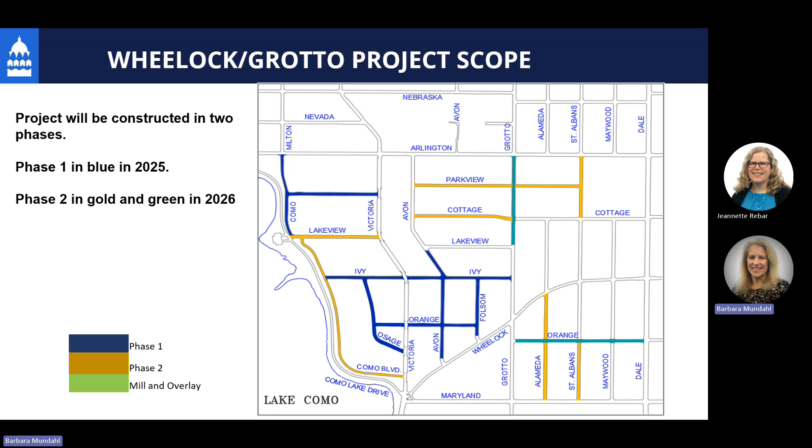So today we're focusing on phase 1, which you can see here, the streets that will be reconstructing in 2025. We plan to start construction in the early summer of 2025 and be completed by mid-November, also 2025.

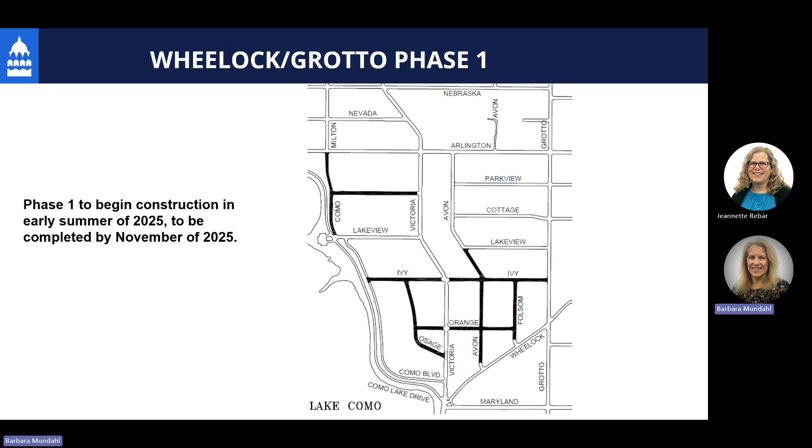The average street widths in the area range from 28 feet wide to 32 feet wide in a 60-foot right-of-way.

Some streets already have sidewalks. Folsom and Avon have sidewalks on both sides of the street. Ivy has sidewalks on the north side only. Orange and Parkview have no sidewalks at all. Most of the streets allow parking on both sides, and sometimes the boulevards have eroded so much from parking that the streets appear a lot wider than they actually are.

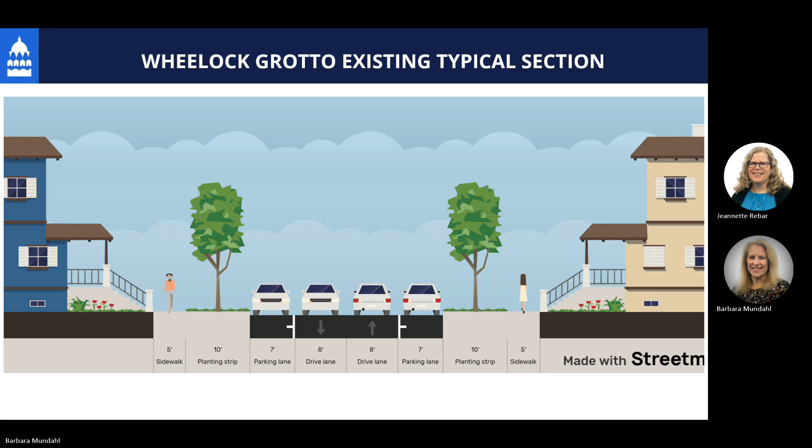East Como Boulevard from Ivy to Parkview ranges from 24 feet wide to 28 feet wide, with parking squeezed in on the east side.

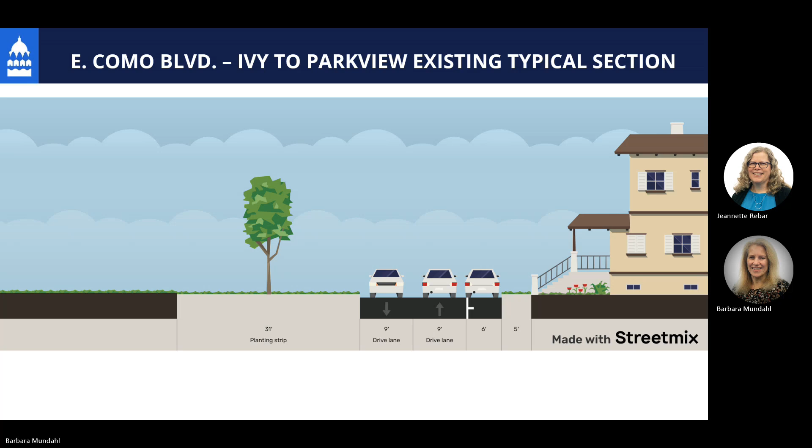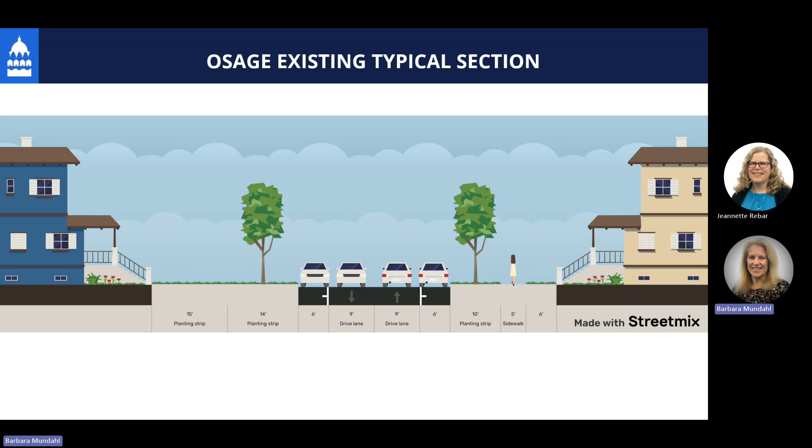Osage has a wider right-of-way at 80 feet, and the street width ranges from 28 to 34 feet. There is sidewalk on the east side, and that sidewalk is about 5 to 7 feet away from the property line. The wider right-of-way allows for plenty of room to install a sidewalk that can meander around trees to minimize tree impacts.

The existing conditions, as you can see, include eroded boulevards and poor pavement quality. Our surveyors have been out there, and I'm sure a lot of you have seen them. What they're doing is recording existing conditions, and they're also verifying property lines.

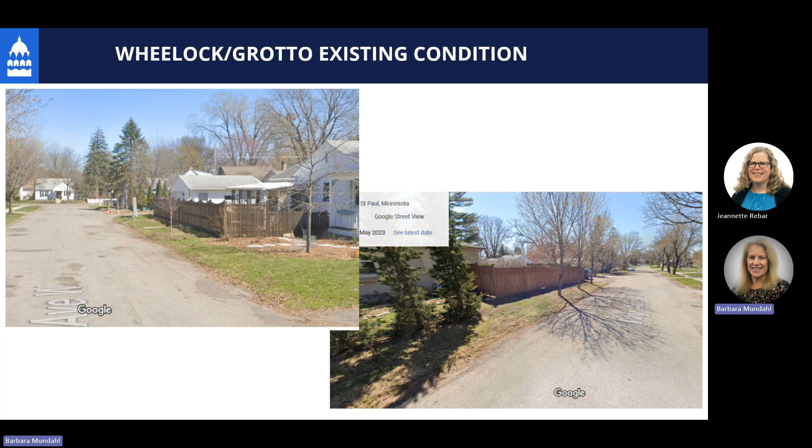It appears that many fences and retaining walls might actually be within the city right-of-way, so our surveyors are verifying those property lines.

There are many carriage walks. Those are the walks that go parallel to the curb, and they kind of act like a curb now. Those carriage walks will be removed as part of the project and not replaced.

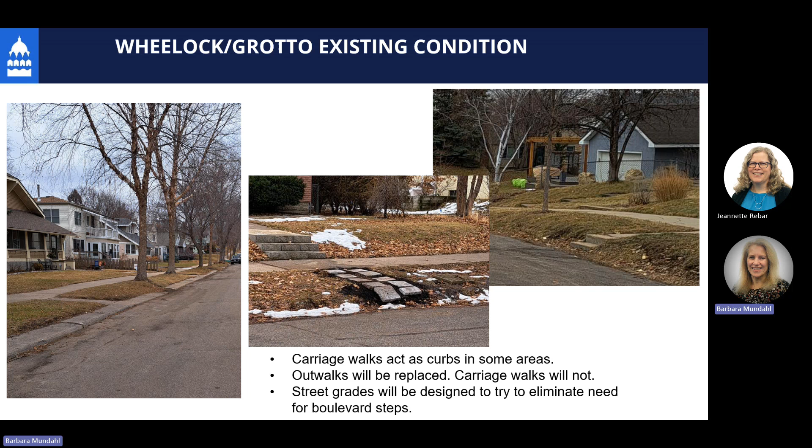However, the outwalks, which are the sidewalks that go from your front door out to the curb, will be replaced. We are trying to grade the streets such that we'll no longer need outwalk steps, and that'll be more of a flat surface or slope down to the curb.

There are many sidewalk gaps in the project area, and we will have some limited space in some areas to create an ADA compliant sidewalk.

There are many retaining walls in various conditions within the project area, and where there are new sidewalks, we will try to stay away from those retaining walls to minimize impact.

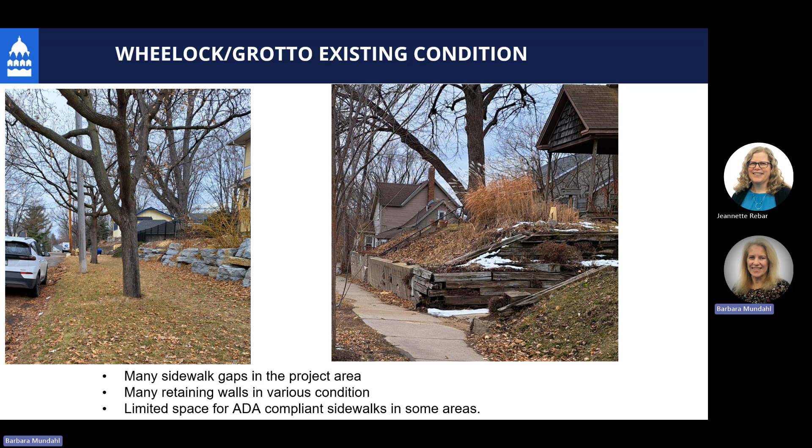So some design topics for the project. I've heard from a lot of people concerns about sidewalks. Paving projects strive to implement council-approved policies, and the sidewalk policy was passed in 2017, recommending sidewalks on both sides of an improved street.

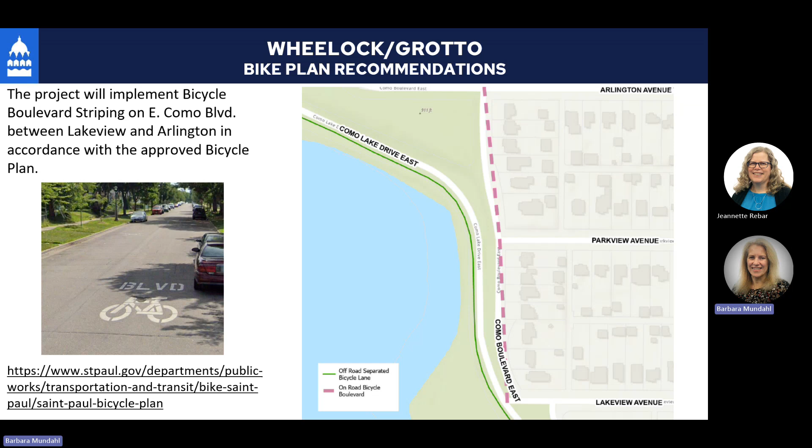We'll also be implementing a bicycle boulevard striping on East Como Boulevard between Lakeview and Arlington in accordance with the approved bicycle plan. This is not a bike trail, simply pavement markings indicating share the road. For more on the bicycle plan, another link is provided.

So what are the proposed improvements for this reconstruction project? It includes new concrete curb and gutter, new roadway pavement, lots of utility upgrades including new sewers and new water main, sidewalk replacement, new sidewalks where none exist, ADA compliant ped ramps, lantern style street lighting, and tree planting.

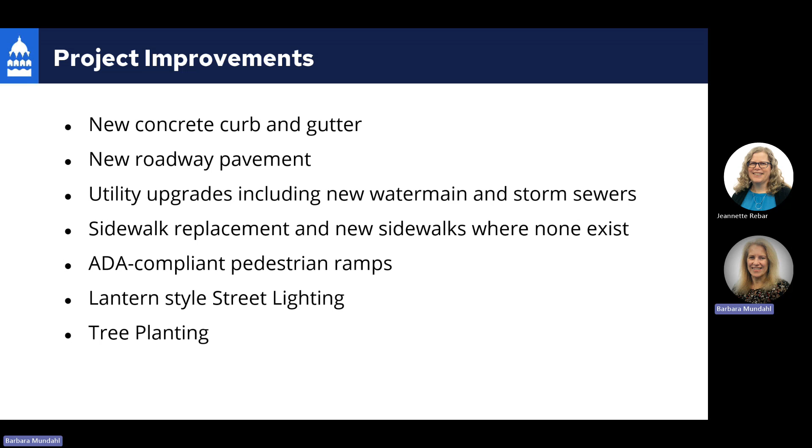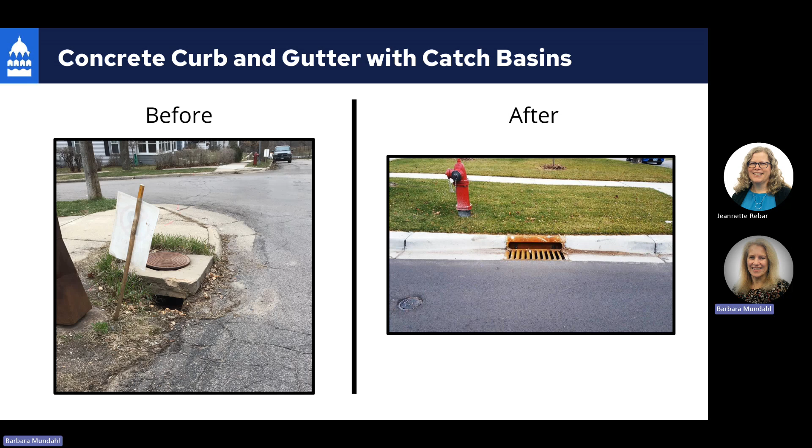So we will be putting in concrete curb and gutter as shown in the after picture with new storm catch basins. The curb and gutter helps manage stormwater and directs the runoff into catch basins. In some areas of the project, we will be installing infiltration trenches under the street to filter some of that stormwater.

As mentioned, bituminous pavement will be a lot nicer, smoother surface for drivability.

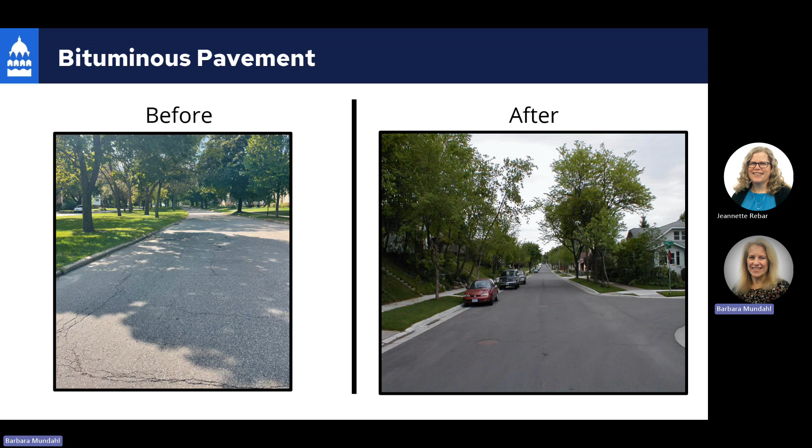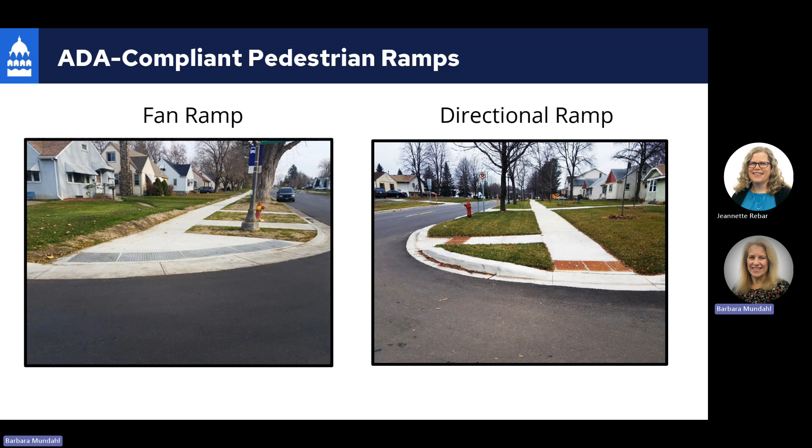With the sidewalks, we will also be including ADA compliant pedestrian ramps. There are two shown here. One is directional, and if this little area becomes too small, we will install a fan ramp instead.

Driveways, all the driveway aprons will be replaced as part of the project. They will be concrete regardless of what they are now. If they're asphalt aprons, they will be concrete. If they're brick or any other special surfacing, it will also be replaced with concrete. The maximum driveway width that we will replace is 12 feet wide.

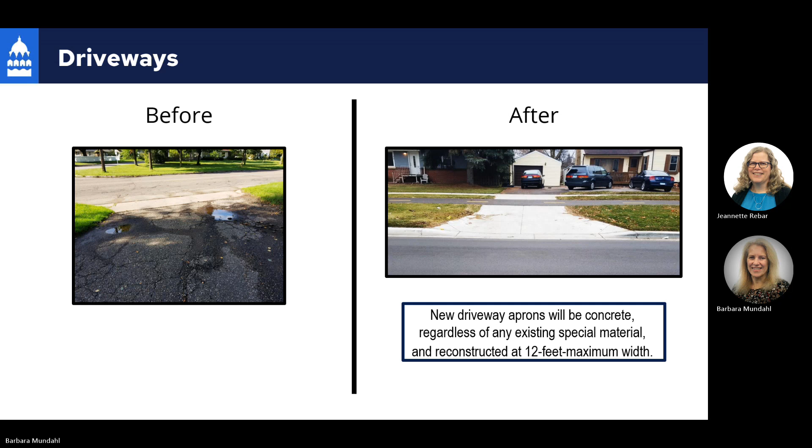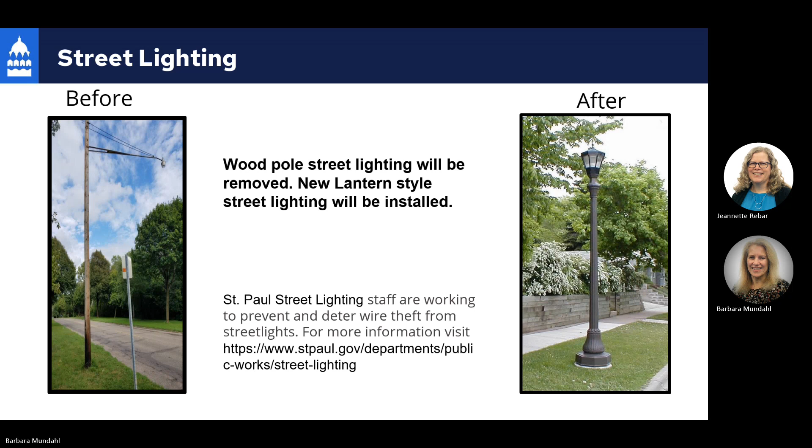There's a lot of very mature trees in the area. Some are very close to the curb and may be impacted by construction. St. Paul Forestry will be out to assess tree health and help us determine which trees will survive construction and which are better to remove. I understand there's been a lot of tree loss in the area from the recent storms.

In those areas, at the end of the project, we will plant new trees. Other potential impacts to existing trees may be lead water service replacement or sewer service replacements.

Trees will be marked prior to removal, usually with a red ring around them. So more to come on that.

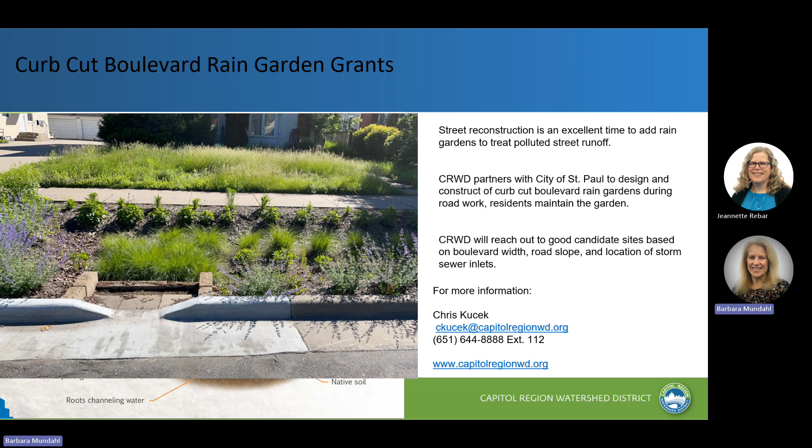If you are interested, you can reach out to me or to Chris Kucek from Cap Regions. Cap Regions will also reach out to property owners in areas that they think are good candidates for rain gardens.

So now we're going to talk a little bit about utility improvements. There'll be a lot of them in the neighborhood. To start out with, early next spring, private utilities such as Xcel Gas and communication companies will be upgrading their facilities. They'll probably start way before our paving contractor does.

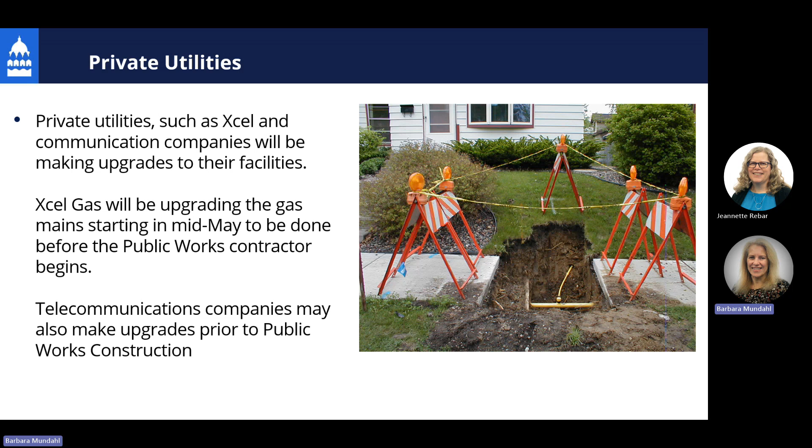They will replace gas services and communication lines, and they'll do a temporary patch, knowing that we're coming in to replace sidewalks and pavement later.

St. Paul Regional Water Service will also be upgrading their water mains. Many of the existing water mains are 6 inches in diameter, and the standard replacement size is 8 inches in diameter, so more water capacity.

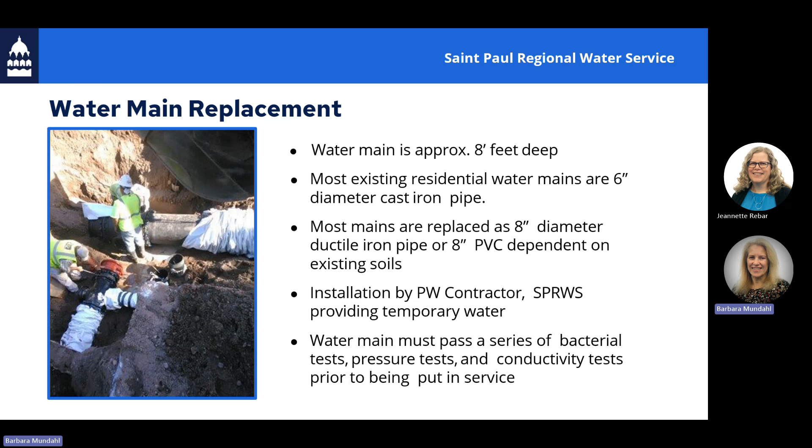The water mains are installed by our public works contractor, but they're inspected by St. Paul Regional Water, and water mains must pass a whole series of bacterial tests, pressure tests, and conductivity tests. So sometimes this process can take a while after the main is actually installed. Just know that they are testing those pipes for your safety before they put them into service.

In the meantime, St. Paul Regional Water will provide temporary water mains, which will be yellow pipes on the surface. The water can get warm in the summertime, but if you run your water, it'll cool down quickly.

These temporary water mains are fully bacterial tested prior to being hooked up to your home. And as an aside, water is provided at no cost when you're connected to a temporary main. So they like to tell people, fill up your pools or your fish tanks or whatever you need, because there will be no water bill during construction.

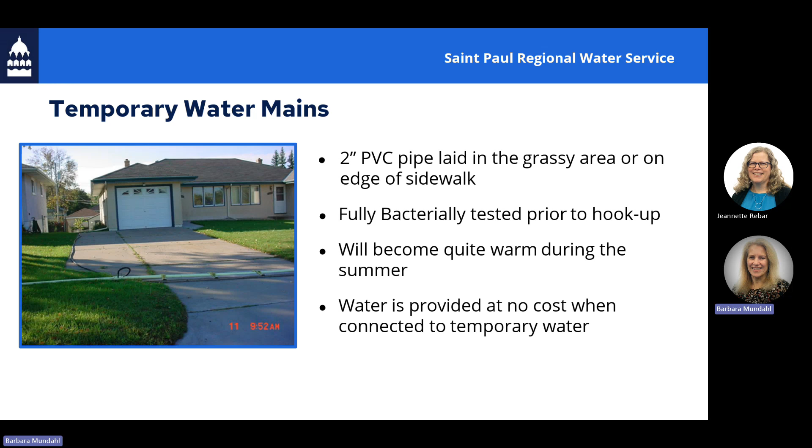When they hook up the temporary water main to your home, they will need access to your home to hook them up. Then when they take the temporary water mains down, they will need access again to disconnect them and then to connect you to the new main.

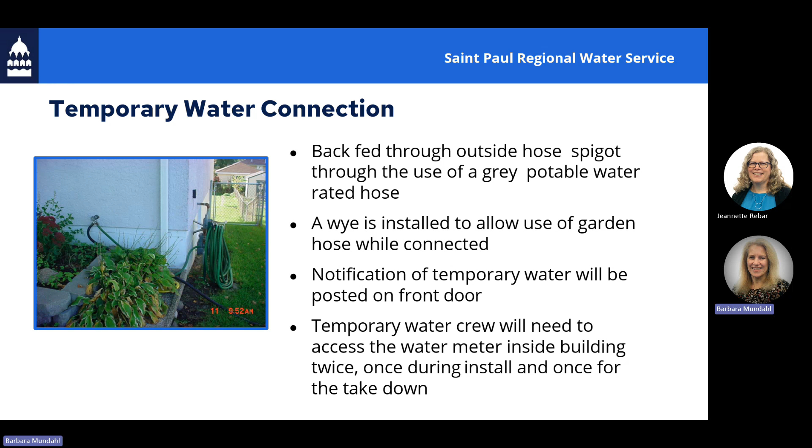St. Paul Regional Water will replace any lead services from the property line to the main at no cost. That's an automatic thing. There is an option to replace the service from the house to the property line, and that is funded by a special federal fund to get the lead out.

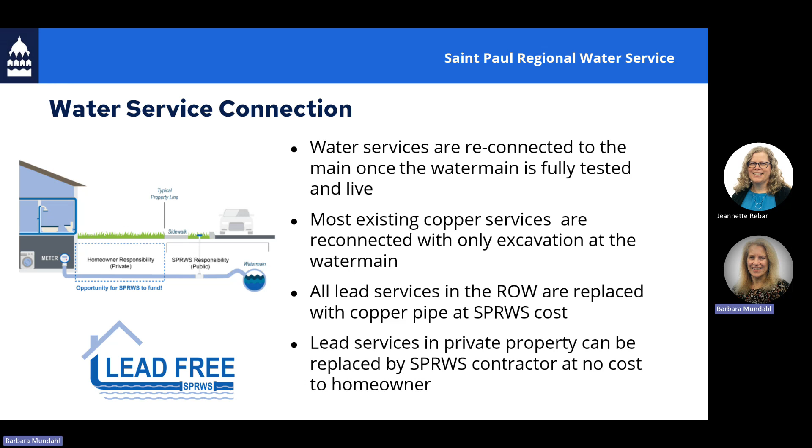For more information on that program, you can contact Luke Sandstrom from St. Paul Regional Water.

So again, St. Paul Sewers will be replacing sewer mains and offering, similar to St. Paul Regional Water, sewer service replacement.

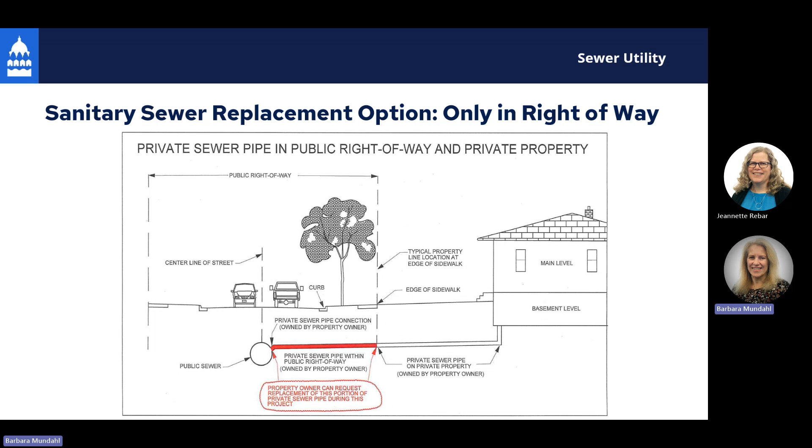As part of the project, we can replace your sewer service from the main to the property line. That is an additional fee that can be added to your assessment, and it's completely optional. You can opt to have the project replace it, and then if you want to replace the portion from the property line to the home, that would be done by a private contractor and organized by the property owner.

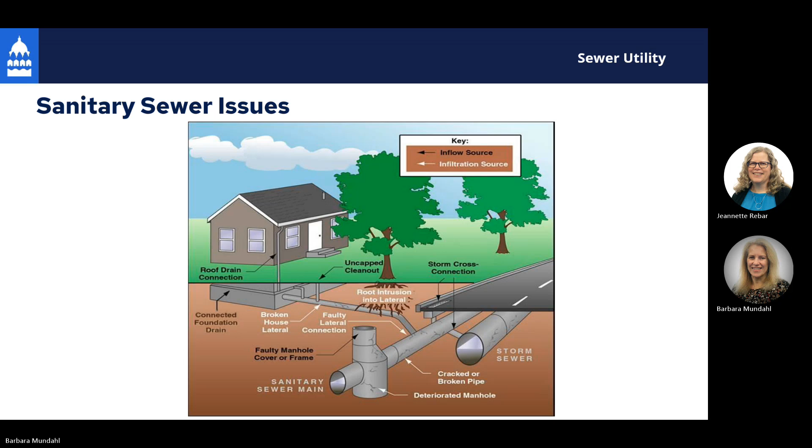Some common sewer issues we see are either a dropped connection to the main or groundwater intrusions into the sewer service. Some indications of a defective service include backups, or if things drain really slowly, if you know that there are trees or bushes planted over the sewer line, or if you have a sinkhole or depression where your sewer service is.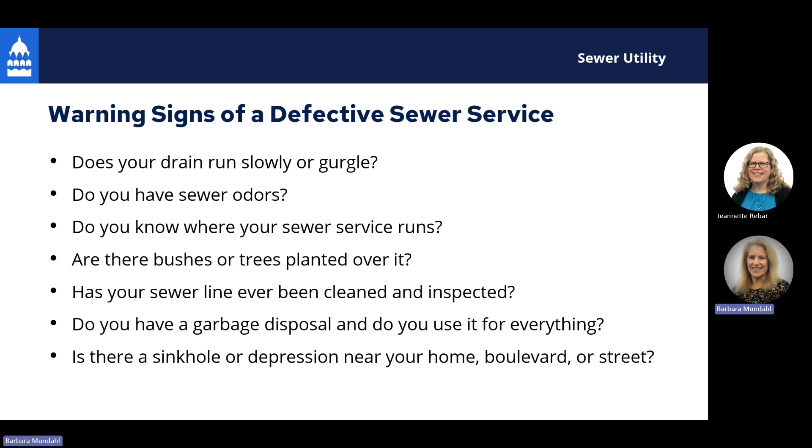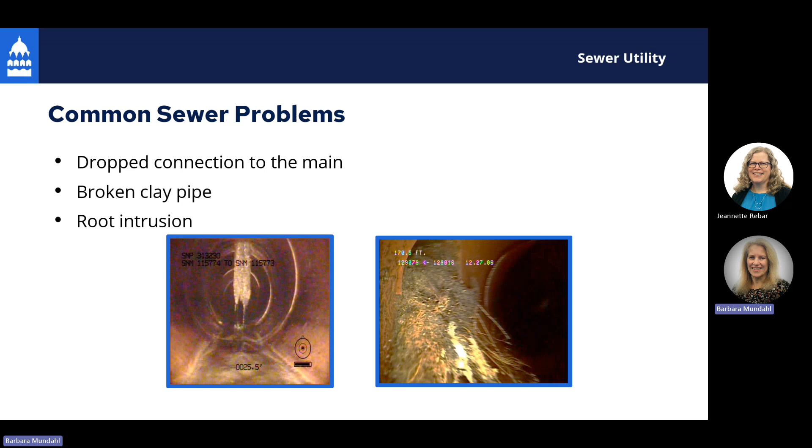Again, some common sewer problems is tree root intrusion, and then a dropped connection to the main.

Some benefits of repairing your sewer service during construction is that it's a lot cheaper with the main, and also you're not paying for street restoration. So again, it is a lot cheaper. You can put it on your assessment and pay it over 20 years.

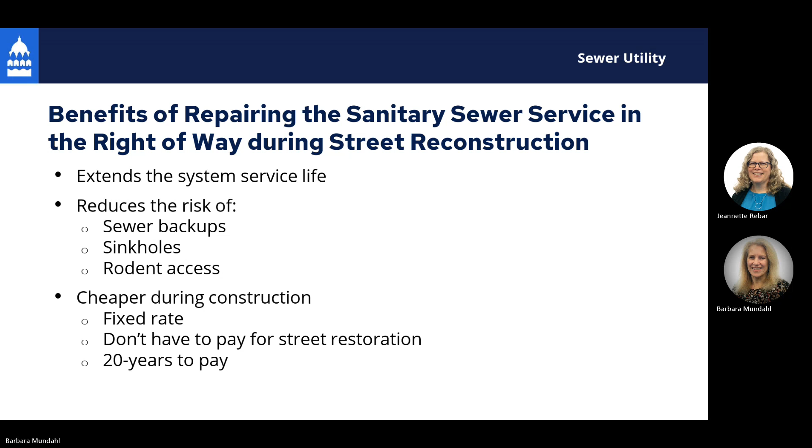Here's just an example of cost comparison with the construction project versus separately.

Property owners will receive a waiver form from St. Paul Sewers, giving the public works contractor permission to replace your sewer service. When you receive that waiver, if you want to take advantage of this offer, please fill out and return it to me or to the sewer department.

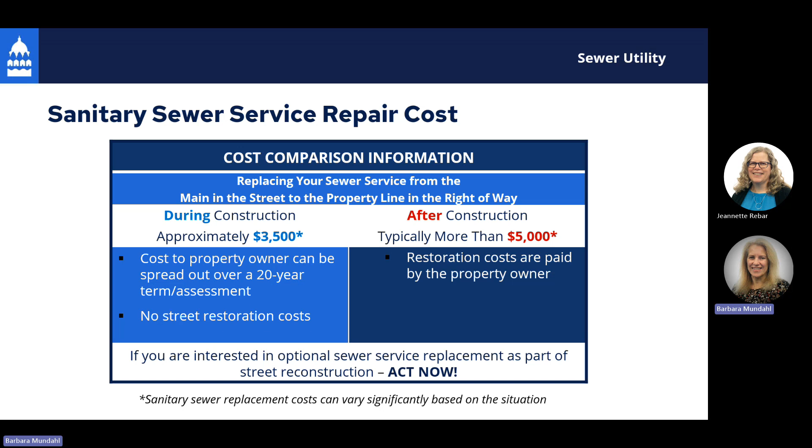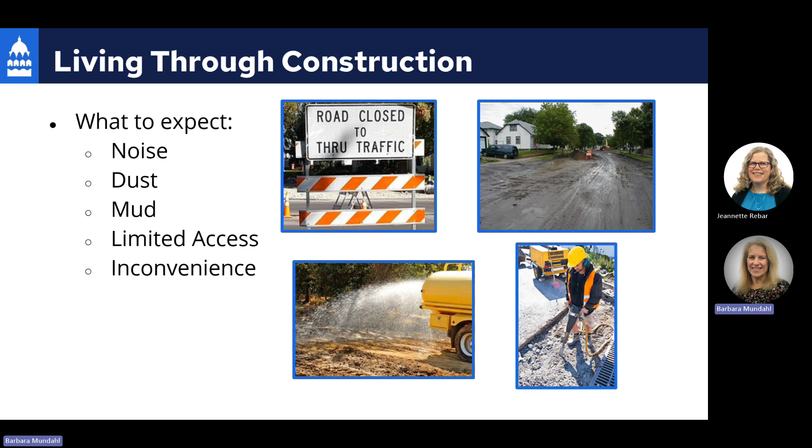So what's it like living through a construction project? It is inconvenient, and you will have some limited access. There will be noise and dust, and if it rains, there'll be mud. We will try to make it as easy as possible, but this is the nature of construction.

Your street will be dug up numerous times by different crews. I know it seems inefficient, but each of these crews specialize in a different aspect of the construction project. Work is done in layers, by different crews. Plan on about 4 to 5 months of disruption.

And when I say that, that's not 4 to 5 months in front of your house. That's for the entire project. Business, resident, and emergency vehicle access will be maintained at all times.

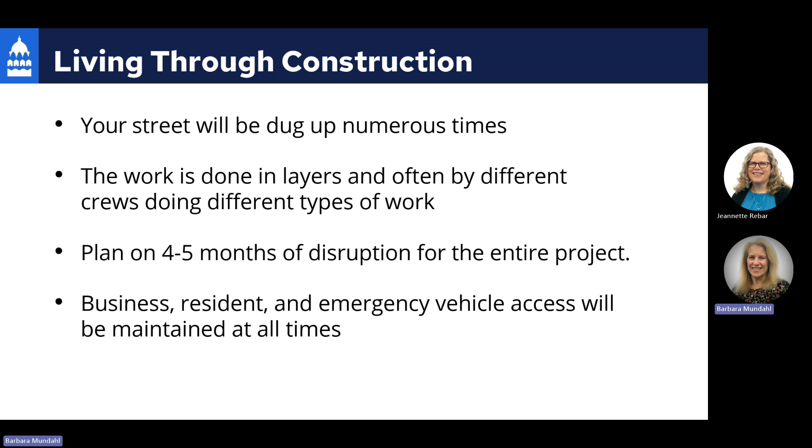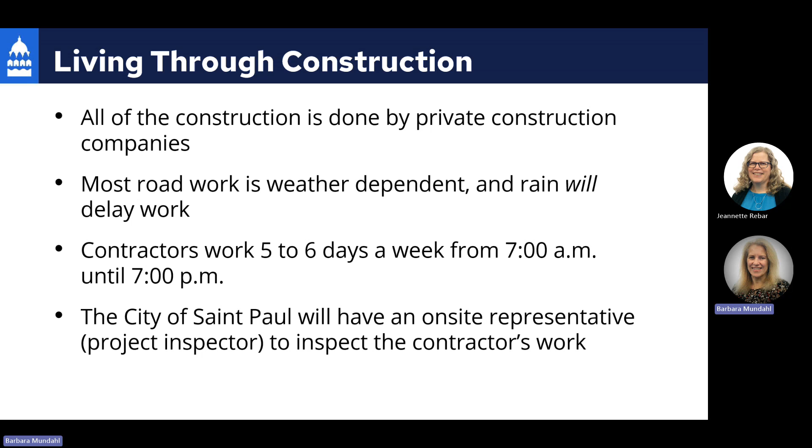All of the construction is done by private construction companies. They work typically 5 to 6 days a week from 7 a.m. until about 7 p.m. The City of St. Paul will have an on-site representative, like a project inspector, to inspect the contractor's work. And of course, road work is weather dependent, and rain will delay the work.

An important distinction between road closed signs: road closed to through traffic means that you can go around these signs to get to your destination, your driveway, but you won't be able to get all the way through.

If road closed signs mean do not enter, it's dangerous - there's probably a gaping hole on the other side of it. And if there's any question at all, do not - road closed means road closed.

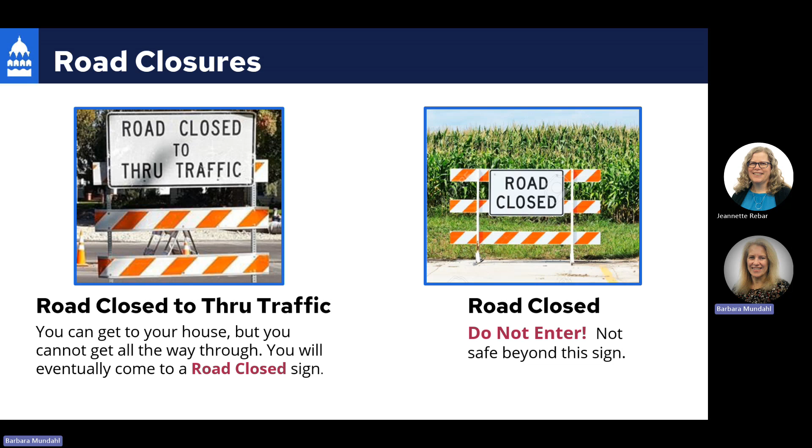You will receive a letter prior to the start of construction. I'd recommend keeping that for contact numbers and names. A flyer will be handed out before construction starts on your block. They usually put these on your front door, so please check your front door for flyers.

Again, we will have an on-site public works inspector, and that is the person that will be there on site and know what's going on. So they should be your first call, and we will provide that person's name and phone number with this letter. And then we will provide weekly updates, posted on our website, stpaul.gov.

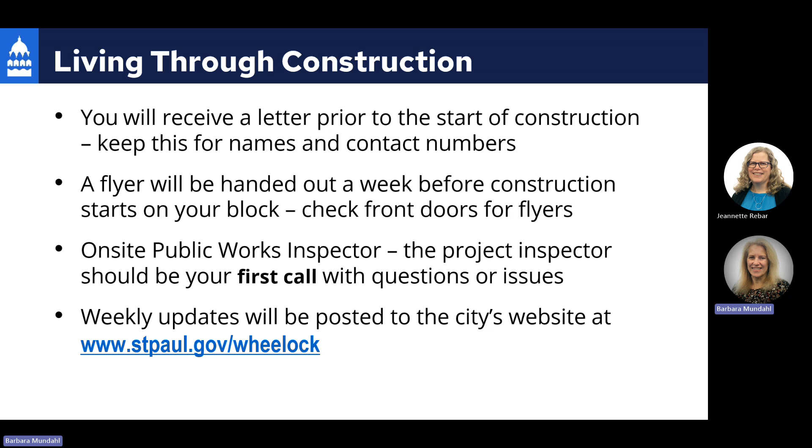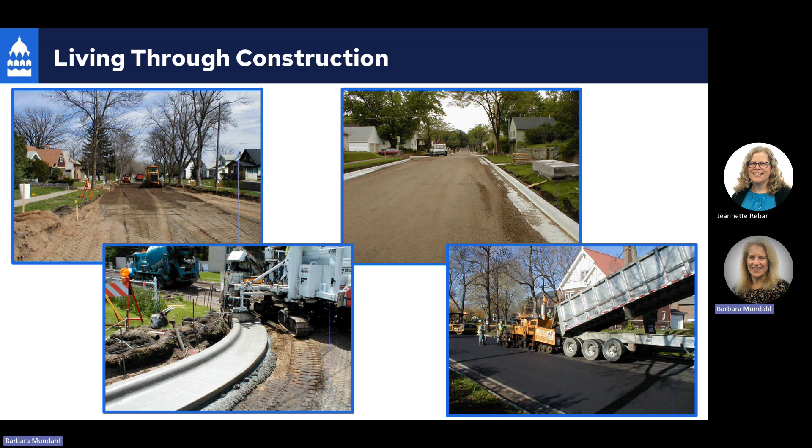Here's a few milestones throughout the construction process. After all the utility work is done, they'll fill the holes back up and start staking - that's what these little stakes are. Then they'll pour curb, do some final grading, and then pavement. So when you see these milestones, you'll know that we're getting close to the end.

A few words about assessments. Street construction is funded by street reconstruction bonds and assessments to abutting property owners. The assessment rates for paving and lighting will be determined after an independent appraisal, and prior to a public hearing. You will get a public hearing notice about 6 weeks before the hearing, which will have your proposed assessment.

Property owners are assessed after the construction project is complete. So you'll have that public hearing, and that's where the city council approves the project and approves the assessments, and then we'll do the project. At the end of the project, so November of 2025, we'll have another assessment hearing. So those will be two separate public hearings.

There will be a separate assessment for optional private sewer repair. If you need more information about assessments, please visit stpaul.gov/assessments.